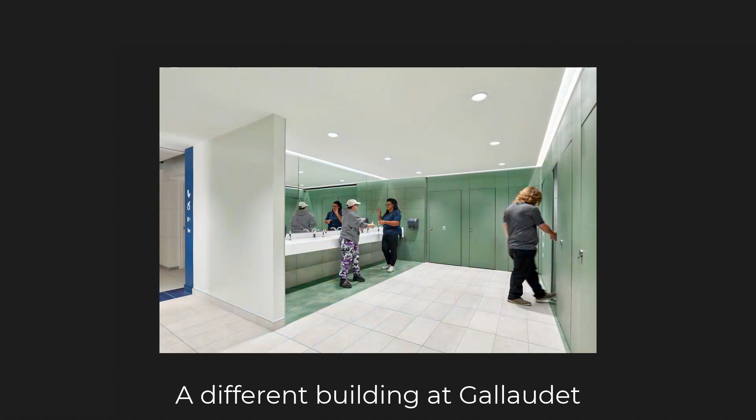So what they did is where the restrooms used to be, there's this lovely lounge, Wi-Fi and everything, and just a series of restrooms, each of which has a sink, a toilet, a urinal, and a changing station. You just wait till one says available and you go in and use it. It's not space efficient, but it's certainly welcoming. And to me, that's sort of the most clear example of universal design that I've seen.

Okay, so I think in this course, where the mouse meets the screen, we're actually going to be drawing stuff. Mostly we'll be dealing with all the issues of accessible routes and of plumbing elements and facilities. Those are sort of the names of those in the ADA book.

An accessible route is everything from the bus stop to the bathroom and the dean's office. It's talking about curb cuts, the angles of a curb cut, so you can get a wheelchair up it, or on your crutches when you break your leg or something or other. Which brings up something else: wheelchairs represent sort of the most extreme case of what we need to accommodate.

But imagine a supervisor in an auto parts plant where you wouldn't be thinking about handicapped access. And he broke his leg skiing, but he's going to be on crutches for a month, and he needs to get everywhere to see what people are working on. He needs to be able to use the bathroom. So it's not like this is just for customers or students. This is for everybody employed and going everywhere, using anything that they need for their job.

So it really is beyond getting wheelchair people into the building. It's the whole thing from the curb to the restroom and everywhere in between, up and down, anywhere that people have a need to get to. Not mechanical rooms, not up ship's ladders into the attic, but the rest of it.

General background, I just want to throw this in because it'll keep coming up as we're going through the different codes. There are a lot of ways to describe a building. One is, how is it built? What is it made out of? From a fire safety standpoint, how combustible is it?

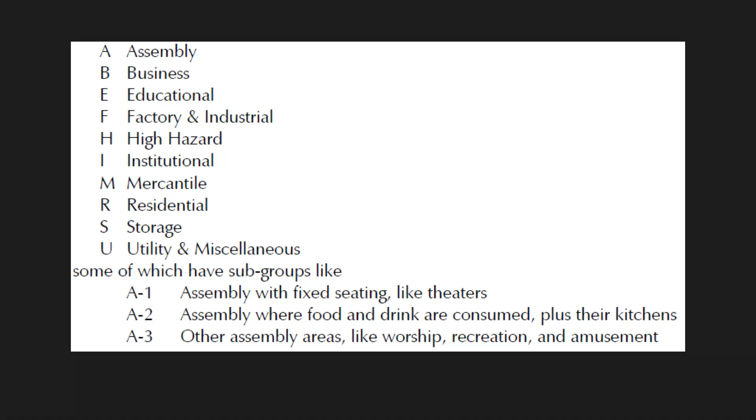And some of those occupancy groups need different kinds of routes to get into them and to get out of them. For now, I'll be mostly addressing accessibility, just being able to get to stuff. But this whole time, a lot of these routes will also be used for emergency egress. And that's where the egress calculations come in, which is how wide do the doors have to be?

How wide do the hallways have to be? How many doors? How many halls? How far apart? What direction do they go? That kind of stuff. And I want to address that theoretically in about 2 weeks. I'll have to study up on it because I haven't been responsible for planning it for a while.

So we're starting with ramps, what's involved with them, and then moving on to stairs. I'm going to skip handrails and guardrails - there's a lot there that I want to cover as part of the talk where I address complex assemblies, like storefronts and other things.

A big part of all this is clearances at doors. Depending on which direction you're coming at a door, especially in a wheelchair, which is worst case, you need to either get next to it and be able to reach it and pull it open, or can you just push it and go in, or does it have a closer? So on page 3, I've combined the 6 most common ways to approach a door and shown graphically the clearance you need, which can't have sinks, walls, or columns in it.

Elevators are pretty easy - basically we're just given a rectangle we need to accommodate, and the ones that come with Revit we can adjust the width and depth to fit the space we have.

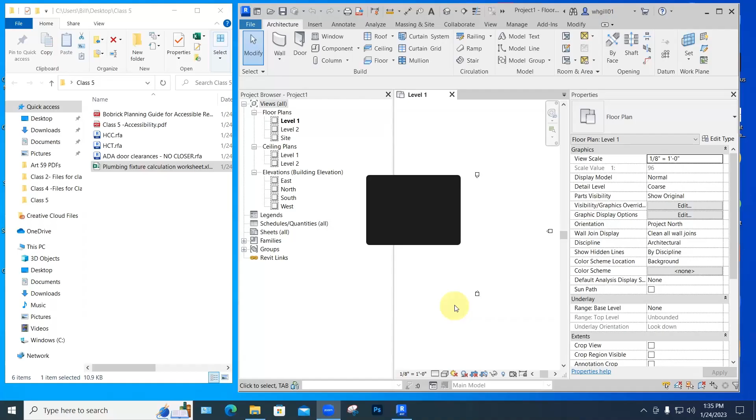First of all, what is a ramp? A ramp is a ramp - if the slope is less than 1 unit up for every 20 this way, it doesn't count as a ramp. An ADA compliant ramp is one whose slope is from 1 to 20 up to 1 to 12. These are horizontal and vertical dimensions, not along the slope. So anything in that range is what we're dealing with, and anything over 1 to 12 is verboten - can't do it in accessible design.

At a loading dock somewhere, they need to put in a ramp to get hand trucks up, and all they have room for is something steeper than that. Fine, do it - it won't be used by people in wheelchairs, so it's not part of the required accessible route into and out of the building. Similarly, you can have as much slope as you want on a site, and put handrails on it if you want.

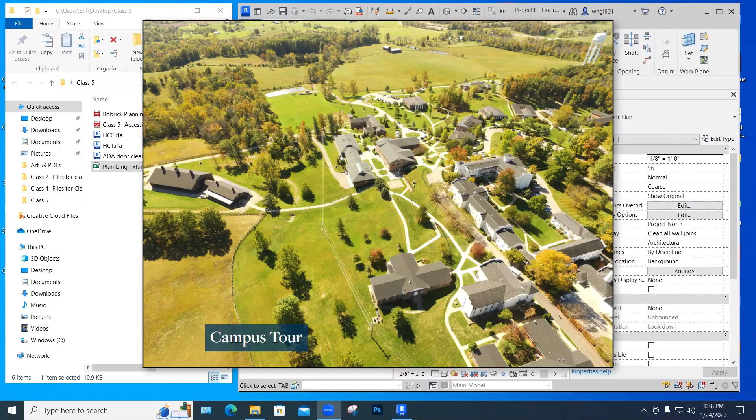For the past 20 or 30 years, I've worked on various projects at a residential school for mentally handicapped adults, some of whom have other mobility and balance issues. Lately, we've been adding handrails to walkways considerably less steep than 1 to 12, usually on both sides even if it's about 8 feet wide. That seemed like extra money, but I asked about it and was told: we don't know which hand works. If you're going up the hill and this is the hand that works, but there's no handrail there because it's on the other side, that's not going to work - you can't back up.

So that was instructive to me to start thinking about, oh yeah, this is more multidimensional than I'd thought about. Ramps got to have handrails, and usually those are 2 parts where the guardrail is what actually keeps you from falling off, and that's usually 42 inches high. Then the handrail is what you grip down below that, so you can pull yourself up the hill.

Ramps need to have a level landing at least every 30 inches of vertical rise. And if we're assuming we're working at 1 and 12, that 30 inches here, we're doing 30 feet here. And then we need at least a 5-foot landing and then another ramp, and then whatever happens at the top and the bottom.

At the top and the bottom, we also need 5 feet just to come off level and get situated and turn around. You can't just come off it and then hit something. You've got to have a place that doesn't have doors swinging into it or columns or anything like that. So that's also 5 feet over here at the top. And that might be part of the floor, or it might be structurally part of the landing. It just depends on what that particular configuration is.

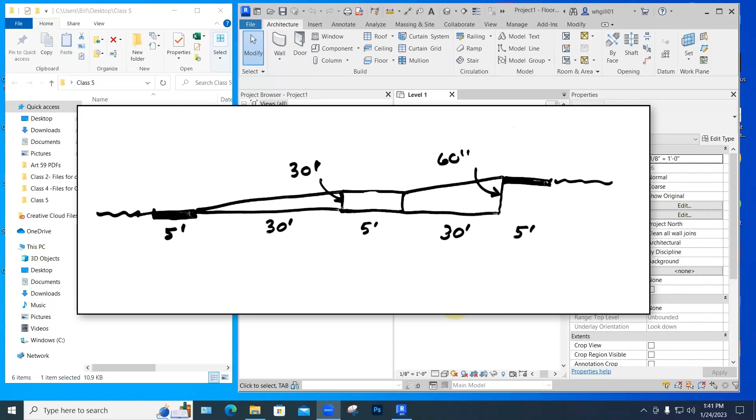But these get really pretty long. If we want to go up, let's say 5 feet, 30 feet there, 30 feet there - the whole thing is 65, 70, 75 feet long to get up just 5 feet. So it's a chunk of space. Easy to do outside, hard to do inside in an existing building, interesting to do in new construction. We're starting to really think about it.

Let's just look at those. The tool here is ramp, architecture ramp. And as we're building that, as we're creating this, property starts determining what kind of ramp this is going to be like. The first thing we do is figure out how high it needs to go from landing to landing. It always defaults back to level 1 and level 2.

So if you just want to go from level 1 up a little bit from there every darn time, you need to come back and change it to level 1. Let's say we're going up 6 feet - so 6 feet is 72 inches. We know we can do 30 inches per run, so we know we're going to have to have at least 3 different runs, 30 maximum, and 12 off at the end. Or we could do 3 24s, or we could do 4 18s.

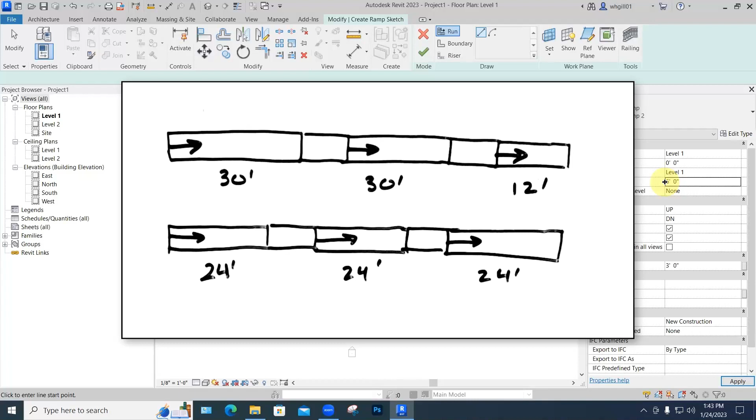You can just do that, whatever your geometry, and if you want to go around a space, like with a tree in the middle, that could be 3 runs. If you want it to zigzag, that could be 4 or 8, any number like that. At some point, the landings just financially start becoming this big amount of it, and I think generally we want to sort of play them back down.

But let's say we're going to do the 30-inch one, 30 and 12 first, because Revit does that all by itself. In edit type, it says, what's the maximum length of incline? And it's just going to stop there at 30, and then we are prompted to start a new run. So this ramp 2 type, I'm going to rename it to be 30-inch rise, just to remember how this is working.

Since we made that change, ramp 30-inch rise, going 6 feet, I'm just going to start here and start drawing. As we zoom in, I have to click to say where I want that to stop - it'll stop at 30 feet. And then the next click will be the end of the landing and the start of the new run. So we're just doing point, point, point, point, point, point - 1, 2, 3, 4, 5, and 6. And for right now, I'm just going to eyeball 5 feet.

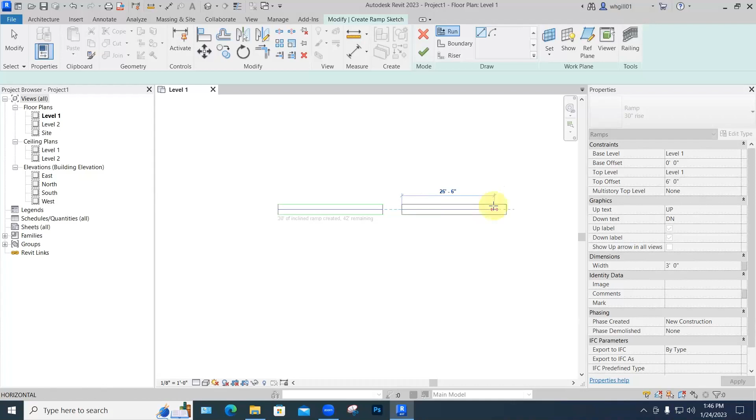I think right now it's 3 feet wide, as we can see here. I'm just going to go over here somewhere, and then here comes my next run, which I can aim in any direction I want, but I'm just going to keep it going straight for now. Click, start my next one, and it'll put in the 12-foot one. I'm just going to say, okay, close enough, good enough for government work.

So it'll turn that sketch into a 3D ramp with a railing on it.

And for right now, I'm going to erase the railings because they are just in the way and I don't want to deal with them yet. So I can just pick the railing, hit delete. It's easy to put them back on. So there's that.

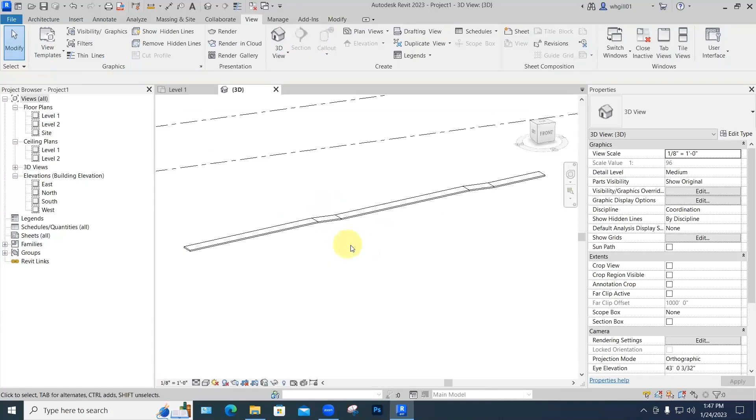Right now, it's hard to tell that that's any different from essentially level. We're just sort of crooked. But if we select it and go to edit type, we can change its shape from thick, which means like a thick slab, to a solid that goes all the way down to the ground like a big exterior concrete ramp. So now you get to start to understand what that's all going.

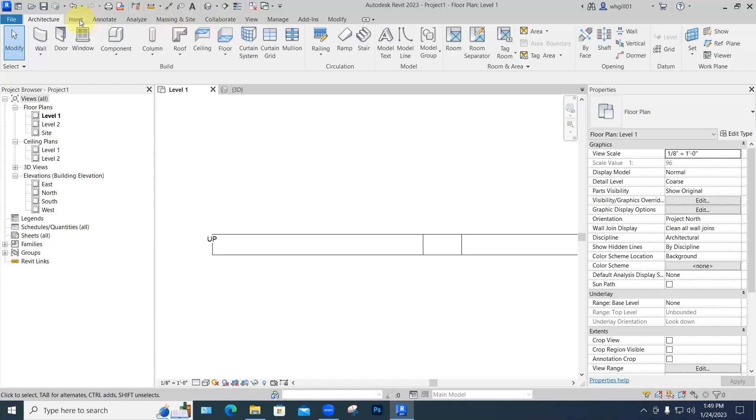Okay, so my boss says, Bill, I want to spend as little money on this as possible. Are you sure those landings are only 5 feet long? Make sure they're 5, but don't go over 5. So I'm going to just put dimensions on here. Annotate, dimensions. And there's our 30. Oh, I spent 5 inches too much.

So fortunately, because all 3-dimensional objects in Revit are created from 2-dimensional ones, all we have to do to change the 3-dimensional one is to modify the 2-dimensional one to be what we want. So if we select the ramp and go to edit sketch, now we're just dealing with lines. And we'll start dealing with stairs the same way, where they have a green boundary that runs down the edge, and then the black risers where either the step happens or the landing starts.

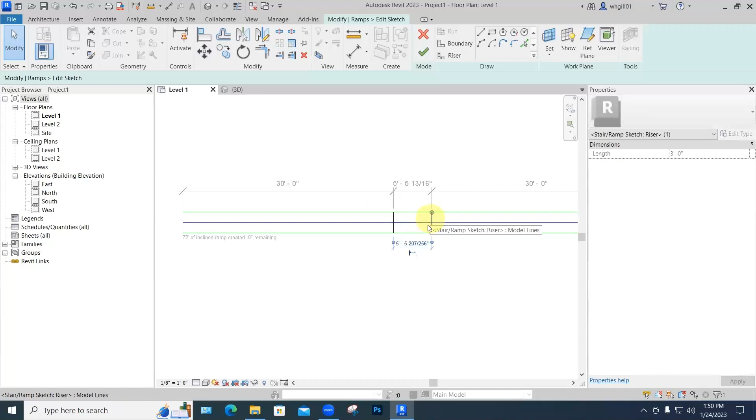So this is fine. If I want to move this guy in to where that's 5 feet, I can select it. And then down here, instead of 5.5, I just say 5 feet. And then that moves down to be 5 feet. In all of these, to change the location or the size of something by using its dimension, which is a wonderful tool, you don't pick the dimension, you pick the thing, because that's what you're modifying. And then the temporary dimension shows up and you change the dimension there.

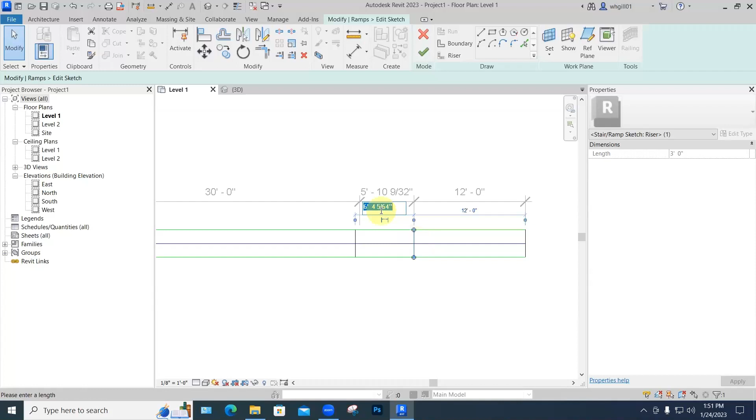So since that moved down some amount, I want to move this down some amount. So I pick that line and it says 30 feet. I'm just going to make it 30. We're still good. And then to move this guy, I make him be 5 feet. And then move this guy, so he's 12 feet. Let's hit OK and see if it works. Et voila! These all take some practice. So there's a straight ramp that goes up 6 feet.

If we wanted one that had even 24-foot sections, we could create it from scratch, or we could just take this one and move the landings, just as I moved them before, so I have 3 equal 24-foot runs. And sometimes it helps me in a plan view to sketch with detail lines what I want to have happen, and play with it on the level of lines and spaces, offsetting 5 feet for the landings, rather than dealing with the whole 3-dimensionality of it all the time. And frankly, I often build my stairs and ramps outside the building shell just so I can see it and make sure it's right, and then I just move it into place with a corner or something.

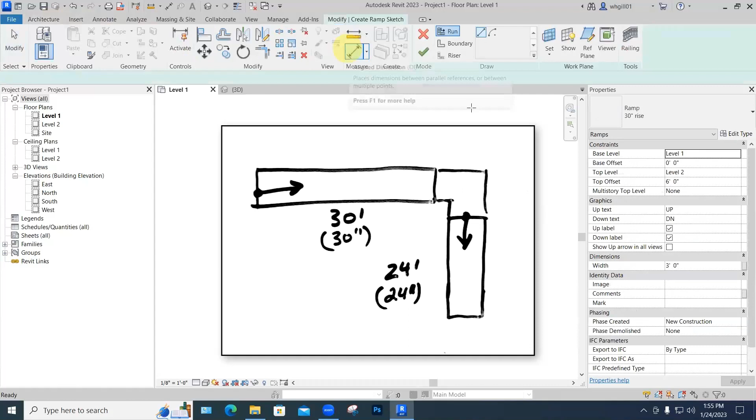So how about an L-shaped ramp? Let's make it 4'6". So we'll do a 30-foot one here for 30 inches and a 24-foot one for 24 inches. And this will be the landing. Here's how you do that. Architecture, ramp. I got to go back and change these. I don't want it going 6 feet above level 2, so it changes back to level 1. Make this 4'6" so I don't have to do too many landings. L-shaped one, 30.

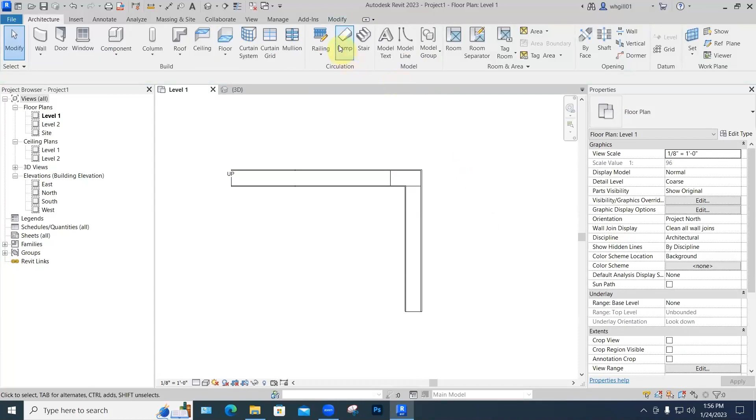And then remember, the next point I pick is the beginning of the next run of the ramp, and Revit will create the landing. If I want the next run to start right there, I'll do that. Or if I want to make the landing be longer this way, I'll go like this and then start it down here, let's say. And Revit will put in the L-shaped landing. Once you absorb how it works, it's a pretty clean process.

Stairs, if you're working inside a room, do you want the points that we pick to be down the middle of the staircase or over against the wall and into the corner? Ramps don't have that. It's just always right up the middle. And we can always adjust it to suit. And when I say adjust to suit, we can now edit this, if it should have been 48 inches wide, or I don't have that much room for a landing.

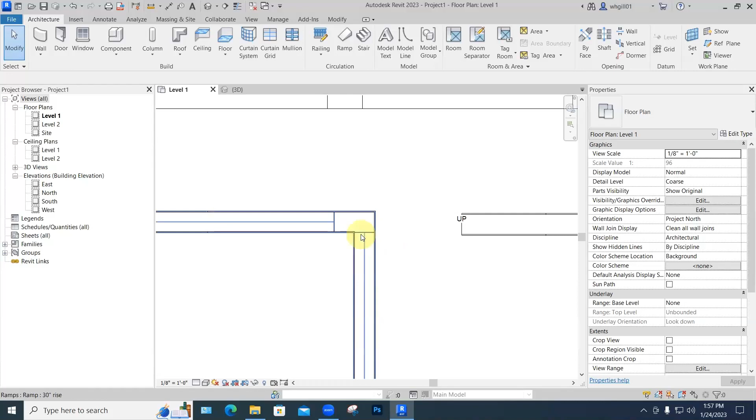You can always come back to a ramp, and let me get rid of these railings just so we see the thing itself. We can select the ramp and go to Edit Sketch, and now we're back just dealing with the lines again. So if I want a smaller L-shaped landing, I can move this down, move this back.

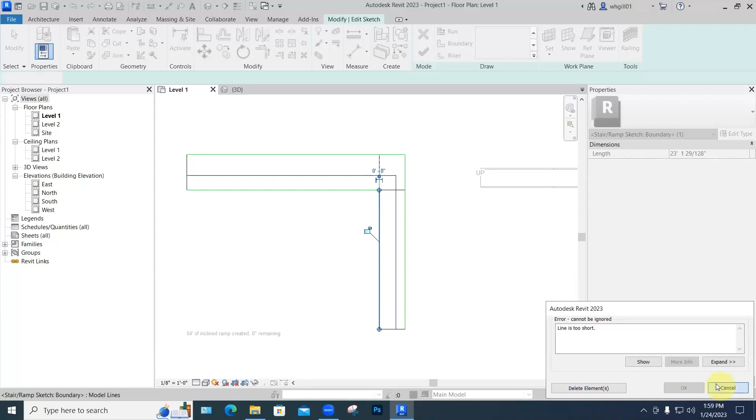L-shaped landing. Well, Control Z. I'd have to think about that. We can stretch these out to make them wider. Line is too short. Cancel. Line is too short. Cancel. That was some little line. Oh, I'd shortened that line up too small.

In which case I can get rid of it and drag this one over to here, and then slide this to be to there. Revit won't check to see if this is a valid ramp until you finish editing, so you can play with the lines themselves to your heart's content. So we can play with these once they're approximately in place. We can tweak them to fit the space available.

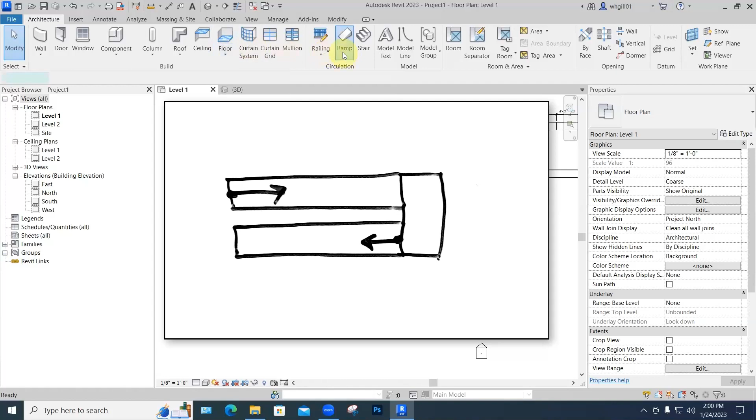What else do we have? Well, I'll try to do one that's just like this, where this one ends, this one starts with a gap in between ramps. Back to level 1. Go there. And then to start in line to go up this way, I'll wait till I get that blue alignment arrow going. Click and click.

And if I wanted them to be equal... Yeah, shortened it too much, but you can play with them that way to make them work. The architectural project template comes with two ramps, ramp 1 and ramp 2. They're identical to start with. And for some reason, ramp 2 is the one I picked, and I renamed it.

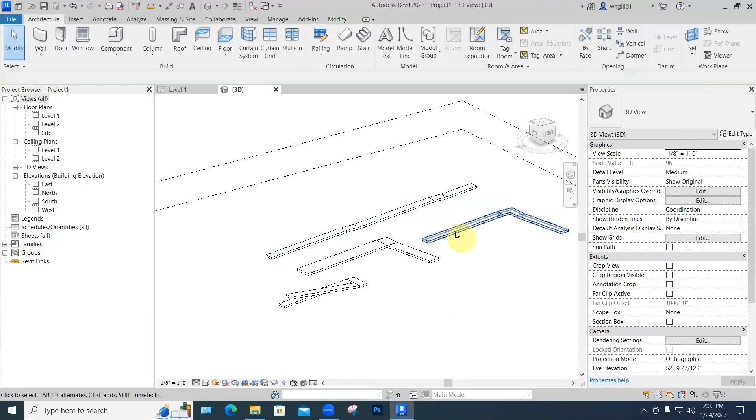If I go into edit type, we have the choice between solid and thick. And thick is just a slab. So if I change that ramp type to thick instead of solid, we can also set how thick it is. Let's say 8 inches. Apply. Okay. So those all become 8-inch slabs, which I'm not going to keep because I want to see the thickness of them. You'll be glad to know that stairs work much the same way.

We define runs of stairs and landings and another run. A couple of things to bear in mind as we're dealing with accessible design: the minimum riser height tread to tread is 4 inches. And the circular one out here is pretty shallow, it seems to me. It might just be like 6 inches or something. 7 is more standard. That's also the maximum. And you can't have open risers. It's got to be something solid that people's toe would meet.

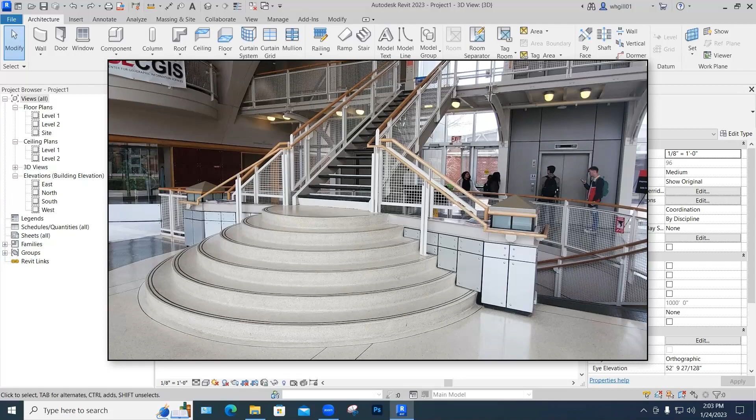It looks awfully nice, that staircase, but imagine somebody on crutches going up there with a cast, and their foot goes past the riser and they fall backwards. That's why risers are closed. Your toes hit something before they go through and imperil you.

Just so you know. Also, the ADA standards come from the Justice Department. It's not like transportation. It's not like health, education, and welfare. It's the Justice Department. And this is the Attorney General of the United States and his minions on down the line who are charged with enforcing this stuff. Even presidents and ex-presidents get in trouble with the Justice Department. So be good, children.

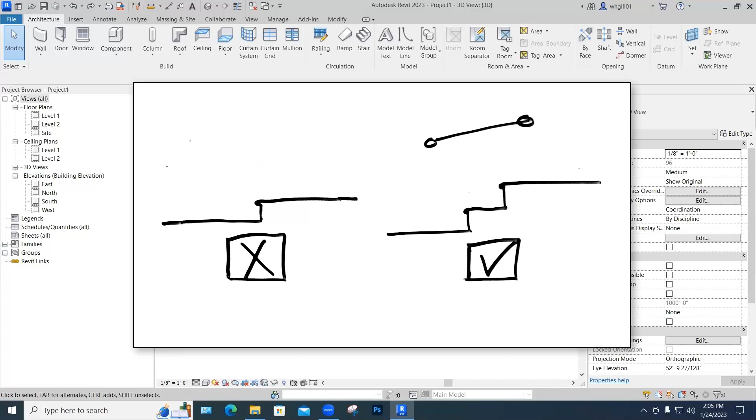Okay, enough of that. Stairs. Minimum tread depth is 11 inches for accessible. And the minimum number of risers in the run is 2. It's really disconcerting, this is a section view, just to have that happen. Even if there's a handrail on the wall, nobody sees it, nobody pays attention. Got to have at least 2 and an appropriate handrail for that whole thing. And the handrail is as much to call attention to it as to actually support people who need it.

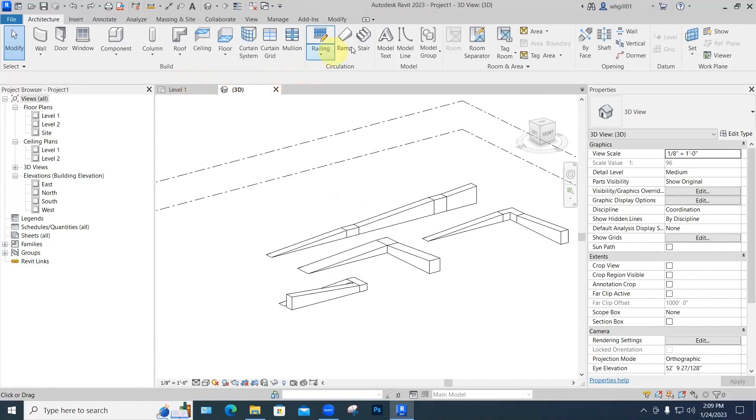And we have 2 types that come with the program. This assembled stair, which is treads and risers and stringers and stuff, or monolithic, which is like cast-in-place concrete, one big solid lump. Let's look at that one first, because it's clear what's going on without dealing with all the parts yet. So let's say a monolithic stair going from level 1 to level 2. Fine. We can draw it in 3D just as well as we can draw it in plan.

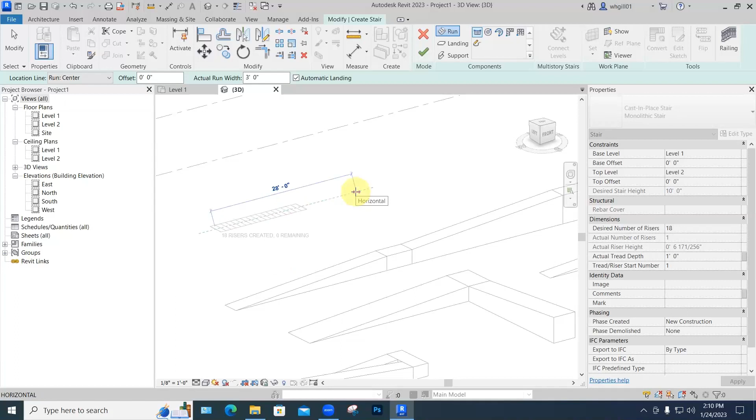The blue line will snap in when we're at 90 degrees. Well, let's see, we'll do it down there. Yeah, when you're at 90 degrees, so you don't have to fake it here. So we're seeing 18 risers created, 0 remaining. Looks good to me. Okay. And again, I'll get rid of these. So if we look at this in a front view, can I do that? Let's move that over there.

Let's put a couple of dimensions on that just to see what we're dealing with. Make sure Revit did what it was told. You can't dimension. This is really a 3D view that happens to be looking at the staircase from the front. It's different from a true elevation view.

This one I can just, if I want, start doing that too, which you can imagine would make dimensions just go nuts. So let's just come into the south elevation view. This is a true view where we can do what we need. Why isn't that working? In the middle of the command.

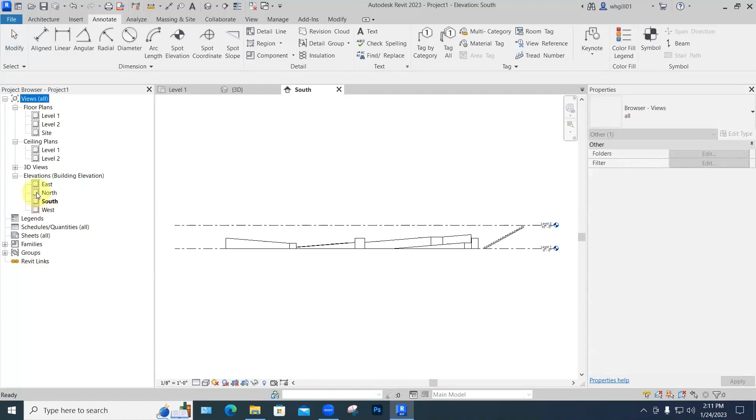What? Huh. Why did that do it? Oh, it didn't do it because I clicked on the little button, not on the word. Let's go back to south. That's where I know what I'm doing.

Okay, now in an elevation view, I can dimension this. Aligned might pick up like the angle here because that's an aligned edge. So I'm going to use the linear tool, which will only give me horizontal and vertical ones. For reasons unknown, it's just not picking these up. I'll try something else.

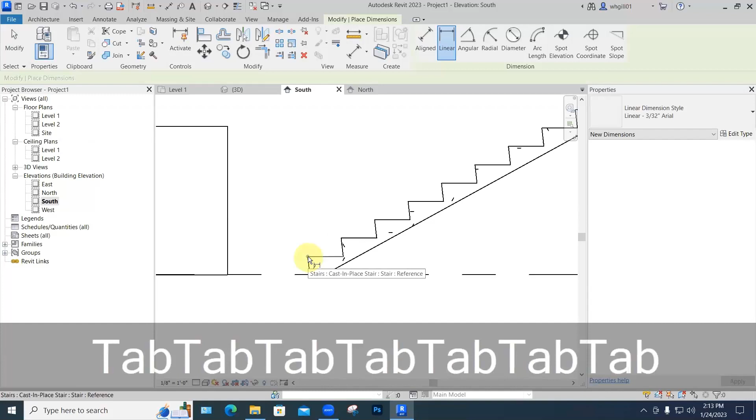I'm not sure why it's not picking up the edges right now, but as with many things in Revit, when you are hovering over a point, you can hit Tab a couple of times until the different things that it could select there are actually selected. Oh, there we go. Well, let me go from endpoint to endpoint.

And then again, with this linear dimension tool, if you drag it up, it gives you the horizontal dimension. And if you drag it sideways, it gives the vertical dimension. I'm going to change my scale from 1/8 to, let's say, a half inch equals a foot, just so my text will be smaller. So that's the riser height.

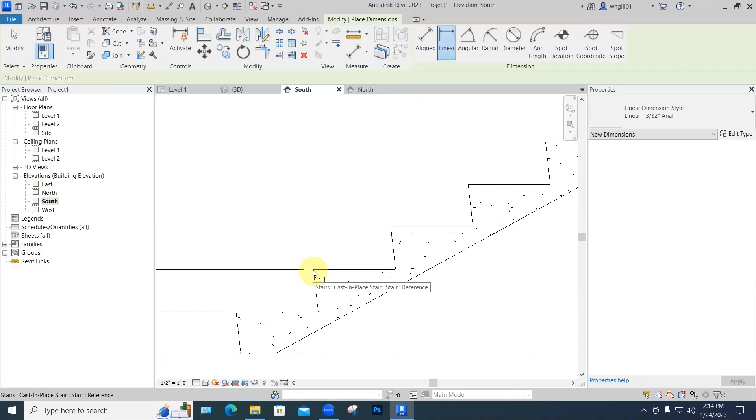And then the tread depth is from one nosing to the next nosing horizontally, and every one of the codes will say the exact same thing. So we'll go to linear. You have to tab till you get a point, tab till you get a point, and then drag it up.

A 1 foot tread depth is greater than I need. I only need 11 inches. Generally, we're trying to keep these as small as possible within the code so we don't have to pay the extra money or take up the extra space. So let's see why that did that.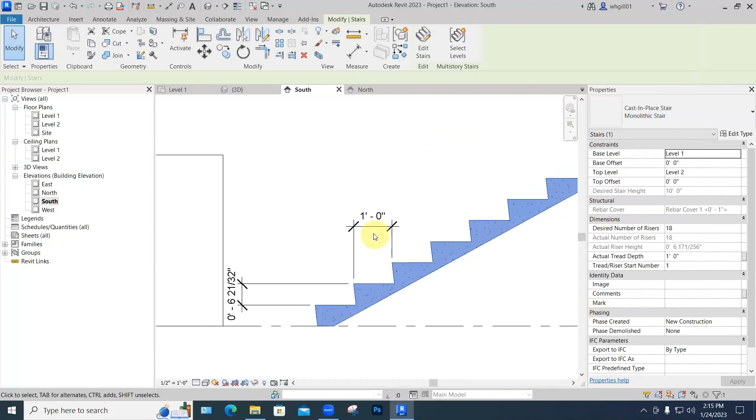If I select the staircase, go to edit type, I can see, oh, that's because that type wants to be a foot. So I make that 11 inches. Apply. Okay. We changed the minimum tread depth to 11 inches, and this is 12 inches, so it's still okay.

Let's go back to do another stair right next to this one to see: architecture, stair, cast-in-place monolithic stair. And we can see that now it's set for an 11-inch tread. Minimum tread depth, okay. Now I'm just going to start right here, and we'll get that far.

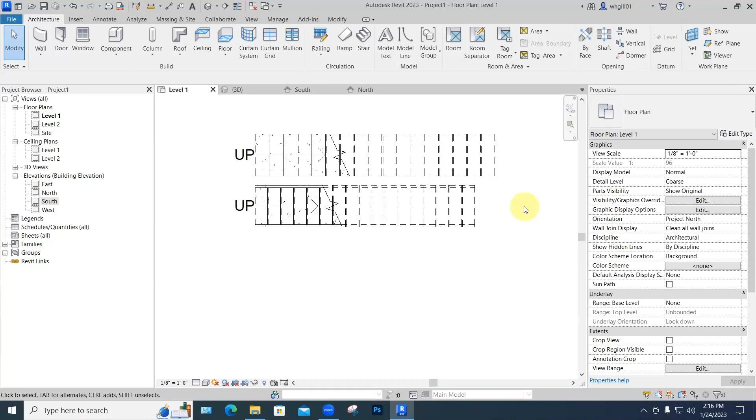And okay. So we picked up 1.5 feet because we got rid of 1 inch times 18. So we're that much shorter. So the riser height will be the same. And the ending height will be the same, but the tread length will have changed from 12 to 11.

So let's say that for some reason we would like to add a landing. What's the procedure? So we'll go with this same stair type, and we go to architecture, stair. It will remember our previous settings. But actually, it would always default back to level 2, but in that case, this is what we want to use.

So knowing that I have 18 treads, I can click here and go to where 9 are created. 9 risers created, 9 remaining. Click there. Come over here a ways, whatever I like, to start the next run.

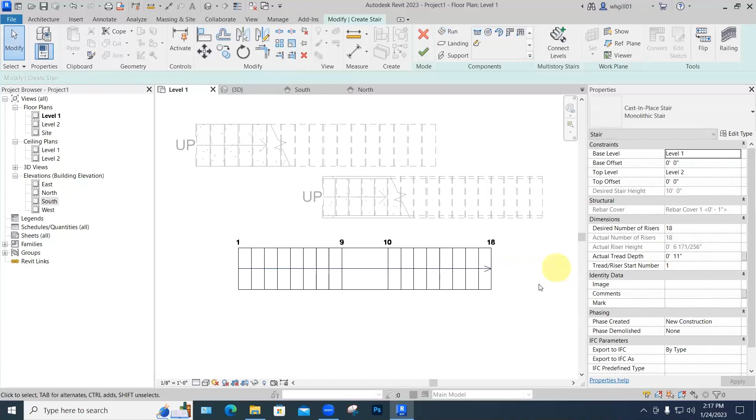And take the rest of them. And I can drag this out past if I want to, it doesn't matter. And we see that Revit has put in the landing from where those 2 points, point 1 and 2, point 3 and 4. Run and run. So there's that guy. And you can figure out how to do the other stair and landing combinations.

Let's look at some of the options that we have with stairs. One would be to change this guy back to the built stair, basically wood treads with risers underneath. We'll change it from being a monolithic stair to being the assembled stair made out of parts. And at this point, these could be anything. We haven't yet determined a material for that. In an office building, that would be a steel channel running up there and holding steel treads. In a house, that might be a 2x12 with the wood treads in between it.

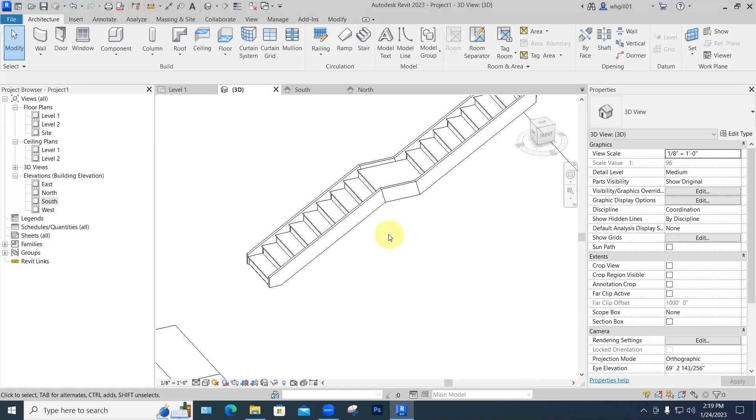But we have a couple of choices of placement for this. Let me put a wall here. Where are we? This guy, I guess. Just to show you some of our options. So if that's against a wall, in a residence typically, and this is freestanding, so you can see we're going up. These are called a closed carriage, where the ends of the steps are blocked off by the stringer.

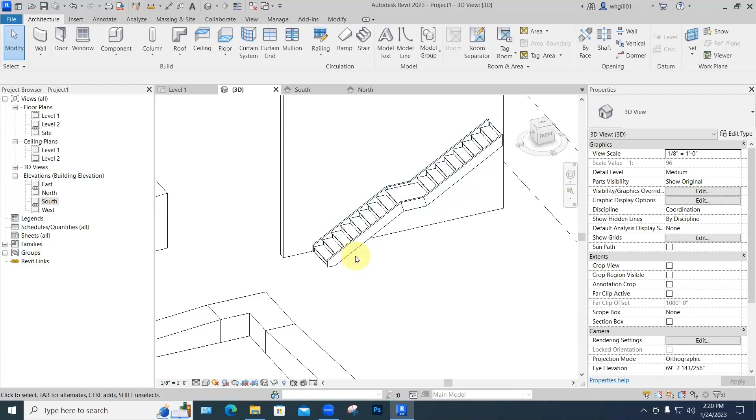If we decide we want, let's say, this side to be tucked in underneath it, we're going to edit the type. So this will apply to all the stairs that we put together like this. So we might really want to duplicate it, rename it to be assembled stair, right stringer underneath or something. But let's just look at what's possible with it. I'm going to edit type. I want to say that the right support, which is the one out here towards the room, I want that to be open. So that tucks in underneath.

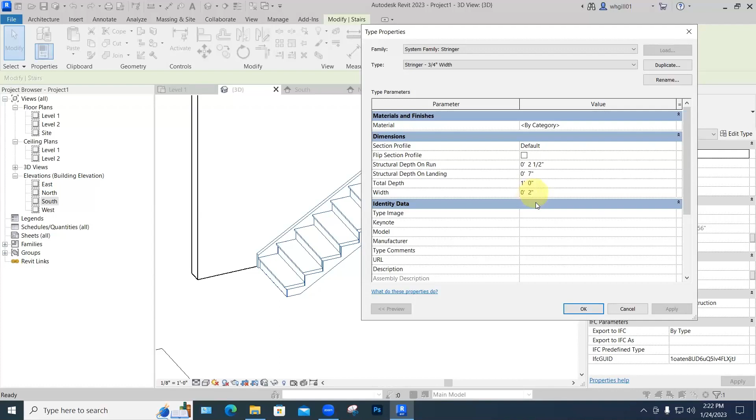And the other one, I want to be not 2 inches thick, but just a 3/4 inch piece of 1x12 that slides in there and receives those. So again, we can go to here, edit type, and say that the left support, this is always as you're going up, the left support is going to be closed, but we're going to have to duplicate this and make a 3/4 inch stringer, just with edit type duplicate. Okay. And then we actually change the width of that stringer to 3/4.

See if I'm doing this right. Okay. Good. And then that shrank down to be 3/4 inch standard trim material instead of a big fat construction 2x12. At that point, I'll need to move this whole thing back against the wall, but you can see what the effect of that is.

And lastly, with this run type, you can see we've got not only a tread, and the treads are rectangles, but a nosing has been applied to this, and we can choose the shape of the nosing. There's just a couple built in, this one and like a half round. And we can choose which edges those go on. So this is like before they put the trim on. I want to basically add that nosing around to the right side of the tread to hide the end grain. So it'll be a miracle if I get through this whole thing doing it right. So run, and there's a 1 inch nosing. Okay, that's good. So we can say apply the nosing profile, not just to the front, but to the front and the right. That should wrap around just on this exposed side.

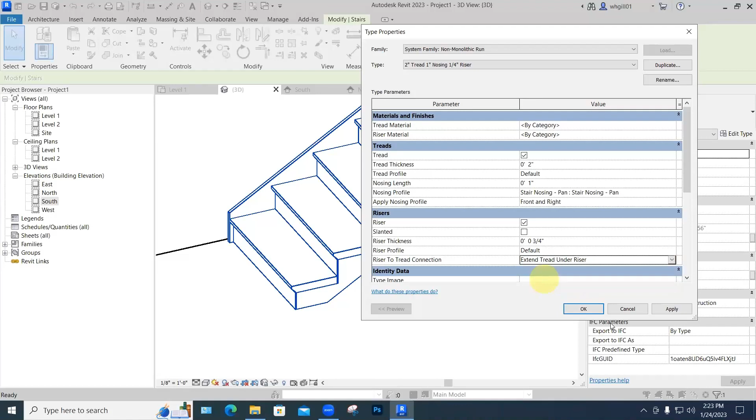And I'm going to make the riser thickness 3/4 inch, because that's what it would be with wood. 1/4 inch is like for metal. And instead of extending the riser coming down behind the tread, I'm going to have the tread go underneath the riser. Extend a tread under a riser. Okay, apply. Okay.

So just with the blink of an eye, potentially a whole building's worth of staircases that are all of this type had our carriage inset, our nosing extends around this exposed side, and this has changed from being a 1/4 inch piece of metal to a 3/4 inch piece of wood.

I would suggest when you are just laying out your stairs, not even to think about this level of detail, but get them in so the big geometry fits your space, and then come in and tweak and tweak as appropriate. Even though it's easy to revise stuff in Revit, to have to come back and fix little things when you've just been making some big changes doesn't make sense. If your whole project works at the same level of detail and gets more detailed as you go along, as opposed to one part getting highly detailed when other things haven't even been thought out yet, it seems to be a useful way to work.

Let's take a 5-minute break and come back at 2:30. We'll start dealing with whatever is next. I wanted to start dealing with door clearances.

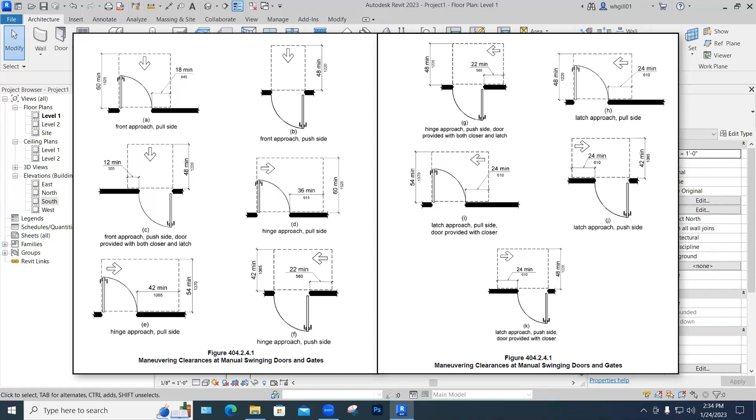Maneuvering clearances at doors. And although the ADA standards has all those little diagrams of what direction you're coming at, depending on whether the door is swinging in or out, it's hard to keep track of all those. For one thing, the doors aren't all drawn in the same orientation, and you're not always coming in the same orientation. Some are left swinging, right swinging, in swinging, out swinging. It's hard to put together.

So last night, I put together something I've been meaning to do for 10 years, I guess, which is a little graphic to overlay on top of a door that you have in place to see if you've met all the required clearances. So let's just go to component, place component, load family. And for me, it's here on my desktop, class 5. It's the ADA door clearances, no closer family.

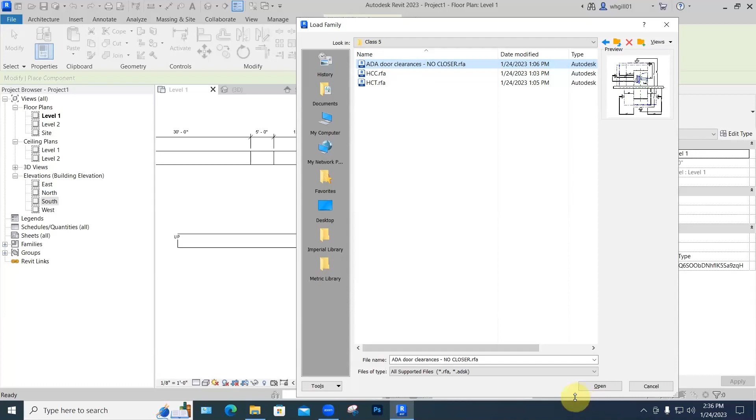And it actually behaves like a door in a wall. You just put it right on top of your existing door to see how it works. So I'm going to pick it and say, okay, let's open that. Oh, okay, my mistake. This is a door. It's made like a door, and it was made that way so that it will adjust with the thickness of the wall when it's being placed. So you don't actually load a component, you actually load a door to bring it into the drawing.

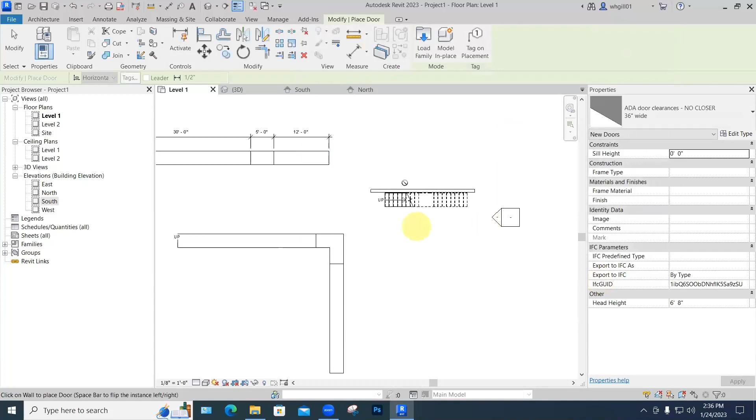So cancel this. So actually I go to architecture, door, load family, and that will import a door into the model, that same one. And we'll do the same thing. Well, these guys are just regular components. So I won't place it right now. I'll hit escape, but it's loaded into this file now, and it'll be here unless we purge it or something. So let's go create a wall. Do a nice one.

I'm going to put a regular door in this wall. A regular door, let's say a 36 by 80 standard door. I'll flip it around that way just to see what's going on here. So that little sketch is a door that we will also insert into this wall. It doesn't actually penetrate the wall, it just sits there.

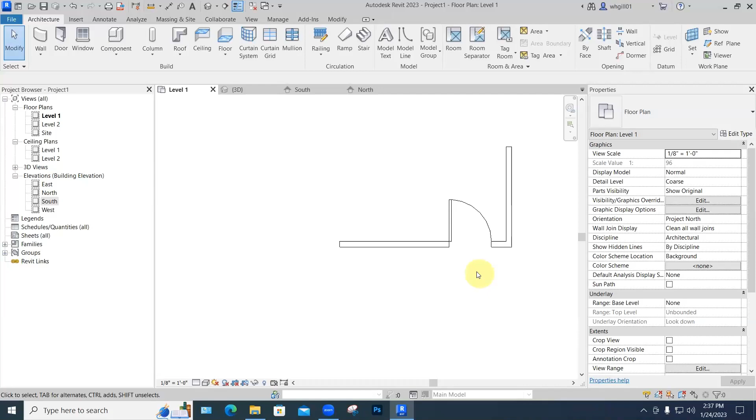The door, use this, and it's only 36 inches wide. I didn't make it so it would accommodate bigger doors because this is what we're all using. And now basically that's inserted into the wall just like a regular door. And it has the same controls, so I can flip it to make it match the door that's there. And then I can just drag it in place so that it overlays the actual door showing the clearances required.

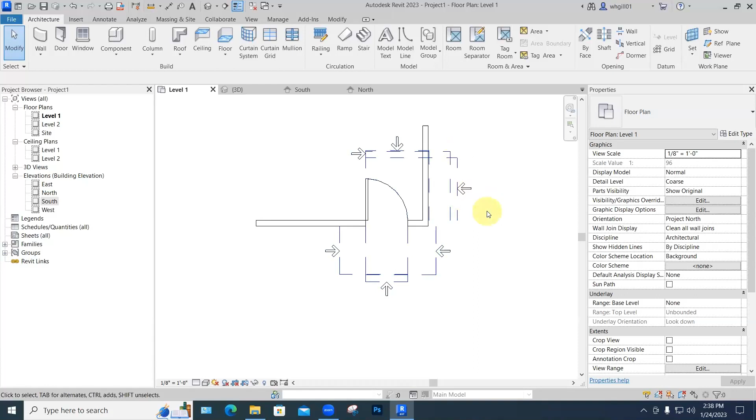So a couple things. A couple are sticking out into the walls, so we sort of want to understand what's going on there. But since we're never going to be approaching this door from this direction, we can ignore this rectangle, which is the space we need around the door when we are approaching it from that direction, which would be pull side, latch side. So it's the pull side of the door of the wall and the latch side of the door.

If we're coming this way, you can zoom and see this arrow indicates this rectangle, which is a 48 by 60. And we can see that one does not work. If we're coming straight at this door here, I need to move this in, click, click, click, until we're at least like there. And then move this door, the real door, until it lines up or is better. It's a nice tool. It's a nice damn tool.

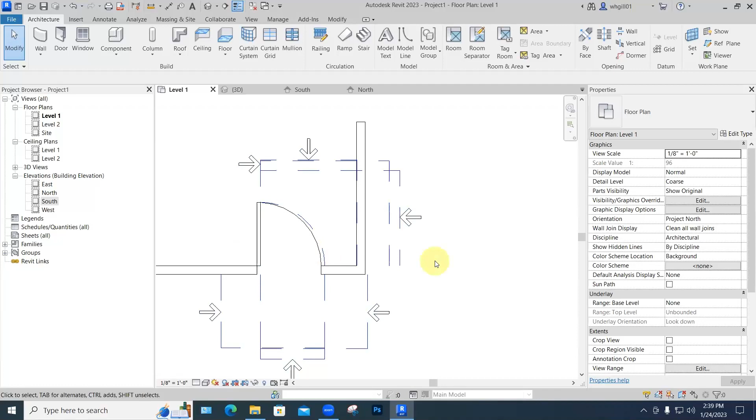And actually this goes over here because we're going to the door opening. Okay, so we got a little bit extra clearance there. And we're never approaching the door from this side, so we should be good. I think in the real world, you would probably flip this door that way, flip this that way, and then move it over so you just optimize your space inside the room. These guys can move together.

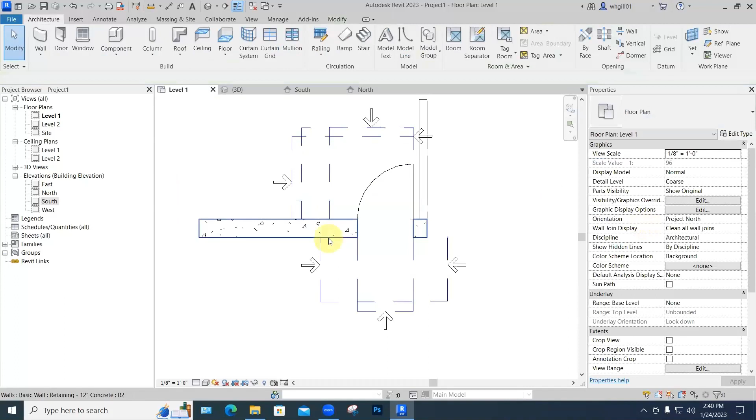Anyway, I'm very proud of this. And let's make sure of something. If I change that wall to something fatter, it does. It works. So it adjusts on the other side. You never know about this stuff. Okay. As we can see from outside or whatever, we're in the clear.

And because it's not part of that door, once you get this one set, you can just erase it or move it over to another one where you happen to need it to be. Yeah, that was really fun to see happen. Let me show you what that family looks like, just as long as we're at it. Edit family.

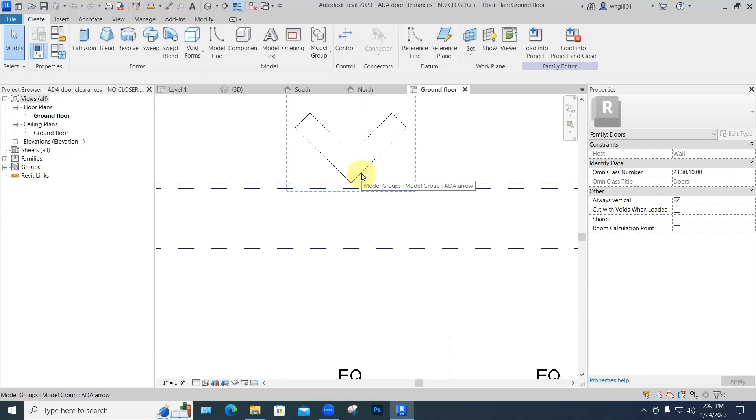There's the plan view of it. What I found was that the arrows, I couldn't just put them right to touch the line they wanted to be on. They jiggled around some, so I made these a foot and had the line locked in at 5 feet, the door locked in, and the arrow locked in at 6 feet. But it worked out. I'm tickled.

With the line types available in this door family, I couldn't create different colored ones, like a red rectangle, a green rectangle, and a blue rectangle. But it's clear what's going on. Anyways, so that's that, we can get out of there. We'll get there, you will get there.

And I should say this guy is just for the regular door with a latch on it, like ones in bathrooms that have closers on them, which swing themselves shut. Does this one do that as well? Yeah, there's a little extra 6 inches here and there to deal with, and you can find those back in the ADA standards to know just which one it is.

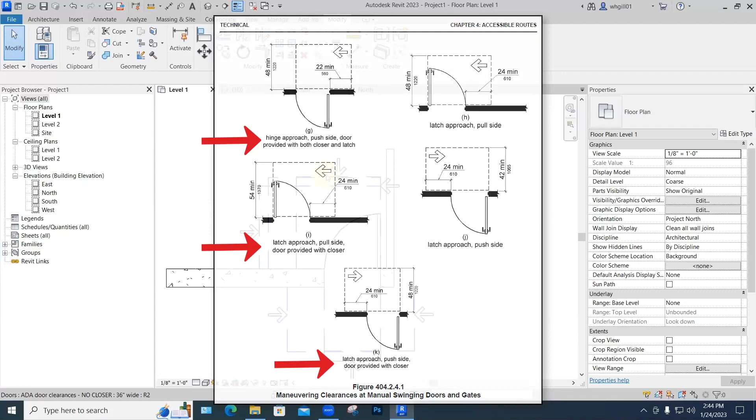I could do another one, door with closer, but there's a couple of permutations on that. So, I find this takes care of a lot, 90 or 95% of the doors that I put in. And I only did it with 36-inch doors.

Standard wheelchairs are 28 inches wide, and the ADA requires a 32-inch clear opening from the open leaf of the door to the opposite stop. So a 34-inch door will usually be just adequate, but except in extremely tight circumstances, a full 36-inch door is almost always used.

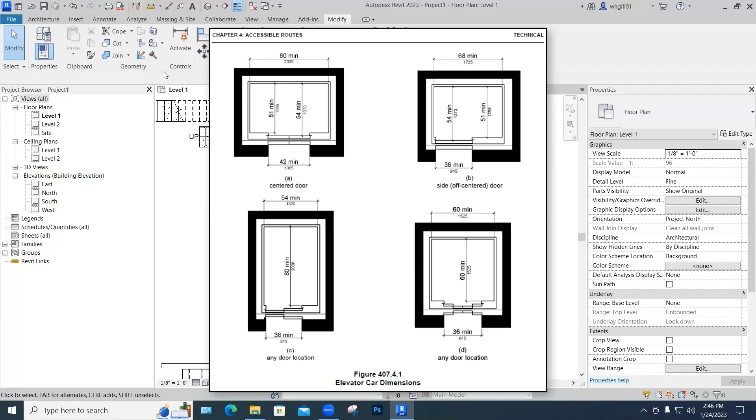Okay, so that's that. Elevators are going to be easy. Interior designers are rarely responsible for specifying the size of an elevator, but generally the process would be to select one of the basic orientations from the ADA standards based upon the size of the hoistway and the location of the door. Select a manufacturer like Otis to get actual cab sizes, and then use Revit to place one and adjust its dimensions accordingly. We just go to architecture, component.

Finding them is the tricky part. Place a component, load family, go over to Revit Imperial Library. And this, I think, is in specialty equipment. Specialty equipment, and we got 2 elevators, hydraulic and electric. And as far as I can tell, the dimensions of these behave identically.

Hydraulic basically has a piston set into the floor of the elevator shaft, drives the elevator up and down, and electric ones are pulled up by a winch up top somewhere, but it's not our business. We don't care. Let's use electric.

Let's see what our options are. Edit type. Well, I think the width and the depth are the size of the shaft, inside sides of the shaft. Cab width and cab depth are the interior measurements of it. That's the only ones really even working with in architectural work. I don't think I've done more than about 10 elevators in 30 or 40 years. It's like I work on little cheap projects.

I don't know, maybe that's it, or they've been there already and we're coming in and doing rehab. But anyway, so you can change all those. And let's say if I change the cab depth, a freight elevator or something we wanted to put in there and make that be 10 feet. Apply. Okay. So it gets deeper.

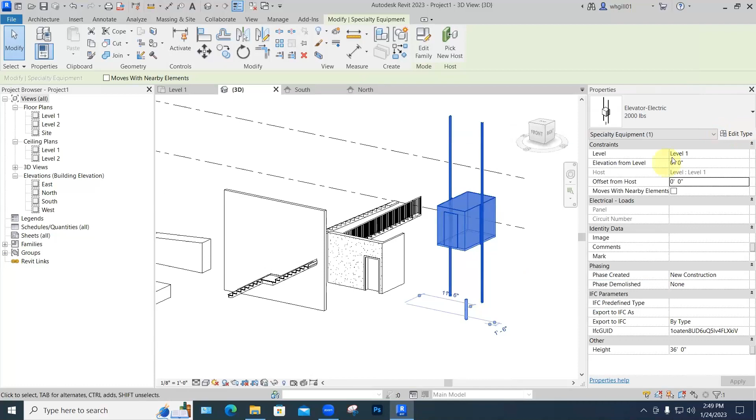Height here refers to the overall height of these rail guides from floor to just below the roof. And then I think we had to edit type to get the, this is inserted on level 1. And you can see that the bottom of the guide rails are there on the first floor. Cherokee and I worked over this last night, and I've forgotten everything we did.

So that's the height, was that a type, wasn't it? There, okay, cab location. So let's take it down to the first floor, to the ground floor. Okay, so there it is. There's its roof or its floor. I'm not sure what is going on there exactly.

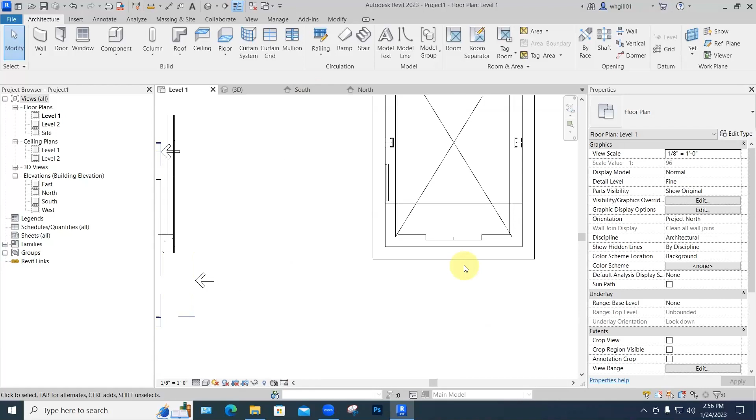Usually the structural engineer, somebody's going to be putting that in. We're not going to be. And really, we're just showing basically a rectangle with an X, and that means elevator. Okay, we'll take half an hour to do some plumbing fixtures. Look at them.

With a lot of these components that we're putting into buildings, the Kentucky building and plumbing codes are going to tell us what we need and how many, like exits and that kind of stuff, and how wide, how many drinking fountains, for instance. The ADA code will tell us what they need to look like and how they need to behave. So there's always sort of this two-part thing going on.

The building code has not, only with respect to things like stair heights and ramp runs, really accommodated the Americans with Disabilities Act, because it doesn't need to. It would just be overkill, and that creates further possibilities of conflict if they're specifying the same thing, and then one changes and the other doesn't, or they conflict. So generally what we need is the building code, and then the ADA to make sure it's accessible.

Let me just tell you what I went through working on this Schneider Hall project to see what's involved in figuring out how many toilets and how many drinking fountains we need. I've done this for you here for Schneider Hall, first floor, but I think Cherokee can attest from her own work on her own house, this becomes part of your self-study as a design professional, certainly to become familiar with the codes and know what's there, and more or less where it is and which book it's in.

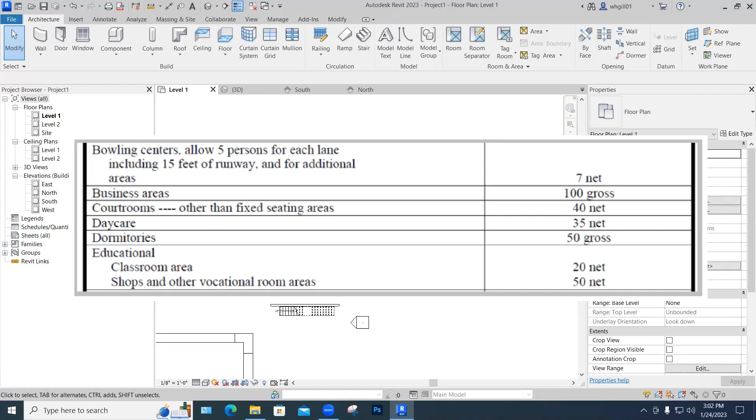So 20 net, that doesn't apply to us. We're much more in the shops and other vocational areas in terms of the amount of room we take up. So I decided to use the 50 square feet net. This is information you would ultimately attach to the drawings and have right there, so anybody can see where those numbers are coming from. So I did a quick add up of areas and got about 24,000 square feet for classroom space on this floor, and you divide 24,000 by 50, and you get 480 people.

Can you imagine being 480 people in class here? So this is when I'm thinking, did I do this right? I think I did, and if I got it wrong, I'll come back and tell you and reissue the spreadsheet. But 480 people. Back in the plumbing code somewhere, it says you can assume, unless it's a girls' dorm or a boys' locker room, that it's half and half. So that's 240 of each, 240 male, 240 female.

Then you go back to the plumbing code to determine how many fixtures per person we're dealing with, or how many people per fixture. We're actually considered a business use as far as the plumbing code is concerned, because it's basically all adults able to get there when they need to. So it's a business use for schools of higher education, and we get those numbers.

We go to page 5 and see that for female water closets, we have 1 fixture per 25 people, which is 240 over 25, or 9.6. You pretty much always round these up. If there's a real space crunch, like in an existing building, you can get the code official to say round down on this floor but round up on the next floor, so we get the same number of fixture units overall.

Same with women. For guys, we split the water closets and urinals, 5 of each. We got 10 sinks. I know you don't have 10 sinks in the women's room, right? No way. So we're significantly underserved, and that's serving upstairs too.

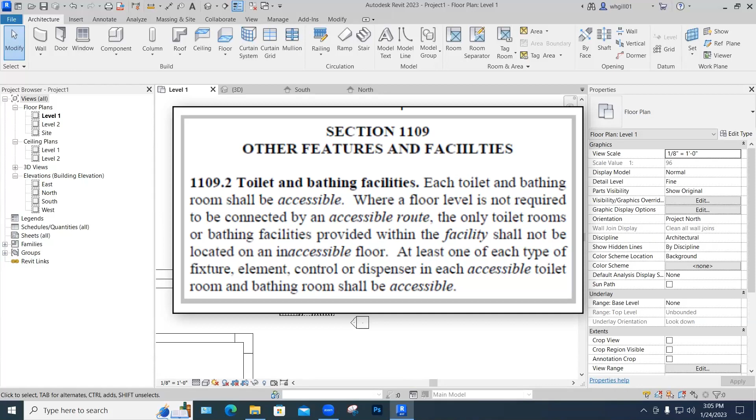That's how many we need in number 4, and number 5 is calculating how many need to be accessible. You go back to the Kentucky Building Code, and it says at least 1 type of each fixture, element, control or dispenser in each accessible toilet room and bathing room shall be accessible. So that nails it down. A couple of these don't need to be accessible, like a private lavatory off the dean's office — it's not open to the public.

So that tells us of those 10 female lavatories, if they're all in the same room, 1 of them needs to be accessible. But building code doesn't address the number of accessible drinking fountains, so you go to the ADA to see what percentage need to be accessible. It's saying basically half.

You pretty much always round up to an even number, because most of the time drinking fountains come in that high-low configuration, and you just plug those in. You've got 2 right together in the same plumbing connection and everything.

Let me show you how that worksheet works. This could be adapted for many other uses just by changing the inputs and the formulas. Once you've gone through those couple pages of stuff, you don't want to have to keep retyping things. So what I made here was a spreadsheet where the shaded cells are where we enter numbers from the tables, and the unshaded ones are where the calculations happen.

So if we figure this went to 28,000 square feet and click out, all those numbers recalculate — more people, more men, more women, more fixtures required. So we need 12 of each instead of 10 of each. If you took out a huge amount of space with your lobby and made this 15,000 square feet instead of 24, they would all reduce accordingly.

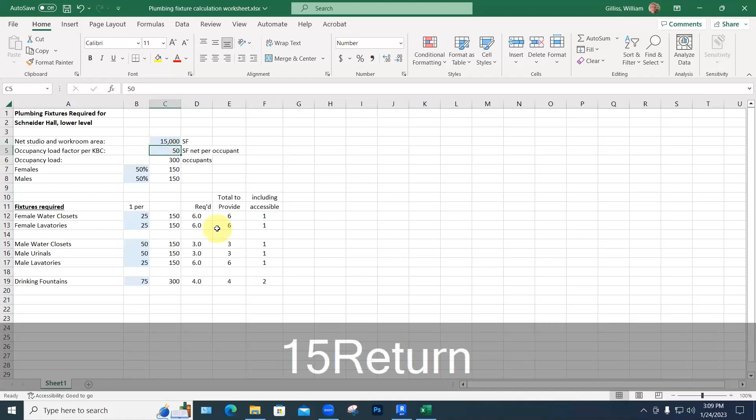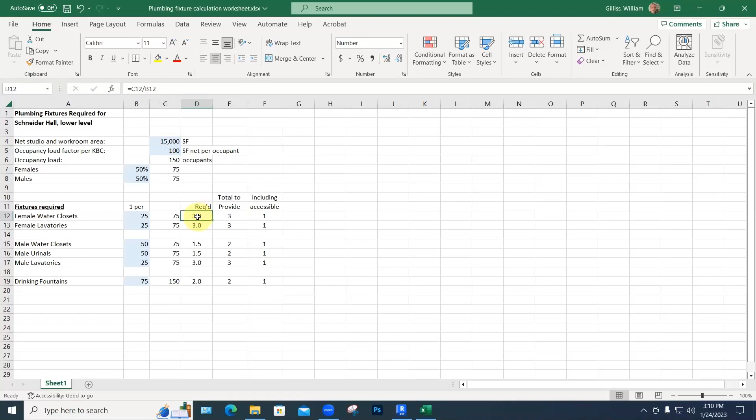And these formulas are dead simple. 150 is just this one divided by that one. The 75 is that one times 50%. This one equals that one, because that's the same number of women. That one equals that one. These are calculated through just a couple simple divisions, and they all keep track of themselves.

So let's take this back to 24,000. Let's see, we need to provide — let's just deal with the women's room where we need 10 water closets, one of which is accessible. Let's just see how that puts together in Revit.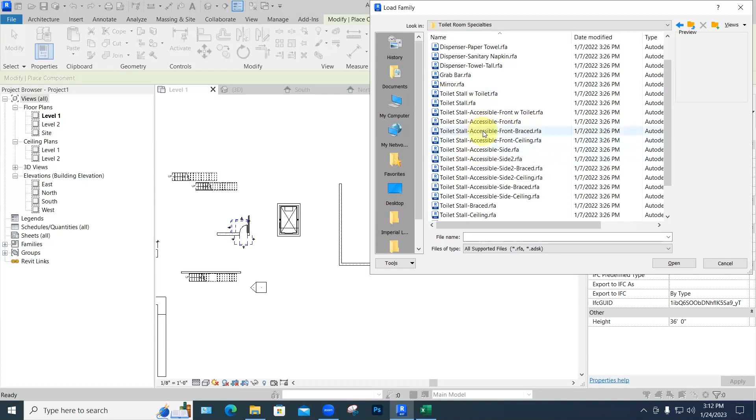So we got standalone grab bars and mirrors and things. The individual toilet itself is still back in plumbing fixtures if we need to place an individual one, but we can just go down and get an accessible toilet stall. Let's use this one, the accessible front with a toilet already in it. How great is that? And these that have bracing and stuff, I don't know, but you can see what we're going to get over here is it won't just place in space.

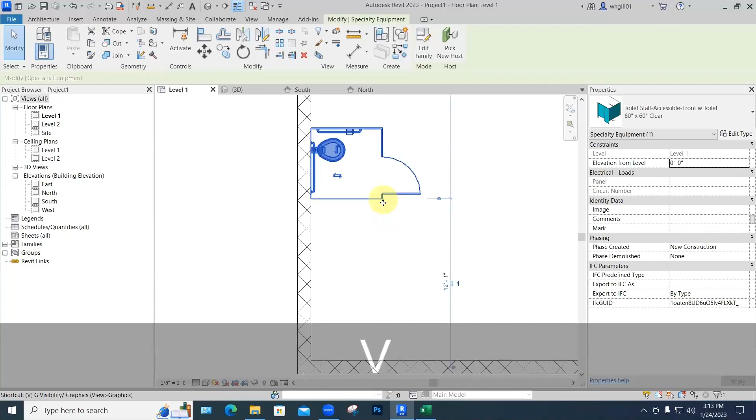It has to put it against a wall because it needs to be hooked up for plumbing. And it's got the grab bars in it already on the door. So we'll just say, okay. And so I can't place it in space, but I can place it along a wall. And then let's just move it down to have this be the last one, just to start things. Which is a pretty common arrangement, so its outswing door doesn't get in the way of anything else. And it sort of clicks into place.

That was easy. The hard part of this now becomes a true design decision. Do I want an L shape? Do I want two parallel ones? Do I want toilets here and sinks here? And then how's the door getting in? And that's what the Bobrick book is really good about. Because we want to think about, basically when you open the bathroom door, all anybody outside should see is a wall somewhere. Not any fixtures, not any people unless they're on their way out.

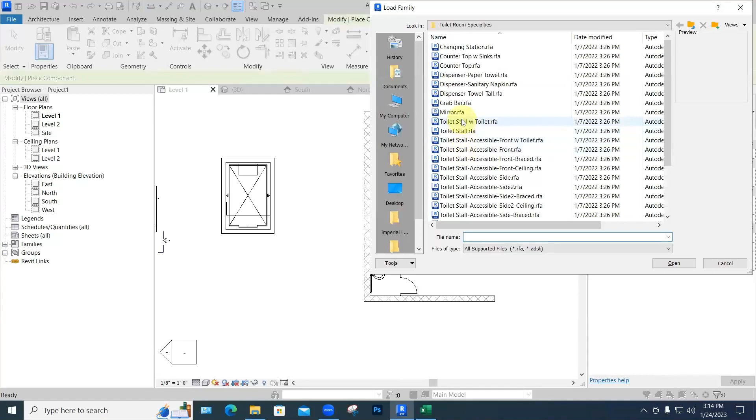So we got that. So let's just say that we're going to do half and half. We're going to do another women's room at the other end of the building, and we're just working on this one now, so I don't have to fill the whole thing up too much. So now we'll go back and get a regular toilet stall component, place component, load family, and here's just a regular toilet stall with a toilet. Overwrite the shared subcomponent family with the toilet stall with the toilet version, blah, blah, blah. I don't know, sure.

Well, my guess is, let's just say, you should use this one, see what happens. And this is the same kind of a deal where it needs a wall and it will click to the wall. And I'm going to copy that down. Move. So what this has given us is the smallest standard stall available. There is one that's not here, which is called an ambulatory accessible. And that's another like 6 inches wider. So somebody can get in there and have a place to hang up their crutches and turn around more conveniently. But for this, we're just doing this.

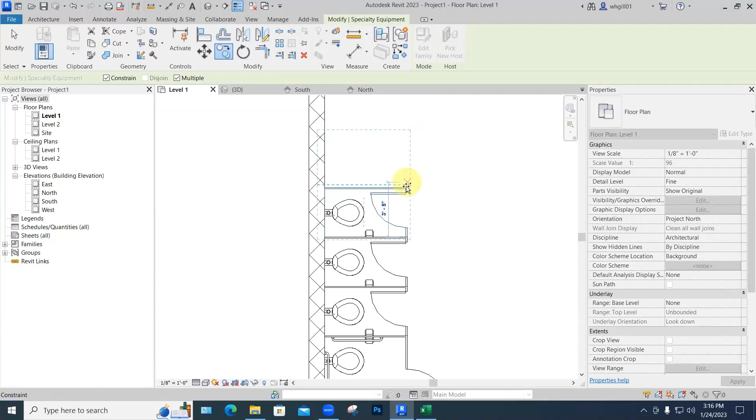And you can see that this is a little short, but it comes with the bigger version that's as long as this guy. It seems like it got a little wider as well. So we can just copy that from there to there. You thought this was going to be hard. You thought I was saving the hardest part for last. I saved the easiest part for last. So there are those. None of these have like a changing station or anything in them yet. Maybe that goes on the wall down here, and then whatever.

A couple things about the toilets themselves: we're showing all wall-hung toilets, which you'll always have in a commercial facility. They take up less space because you don't need the tank, and are far less prone to vandalism. With a residential toilet, you've got that little tube coming out through the wall or the floor or something or other. Don't have any of that. There's no bobbers to mess up and keep running. It's just very straightforward. And they're much easier to clean. You can just mop right underneath them because they don't come down to the floor. So that's all you're going to see here.

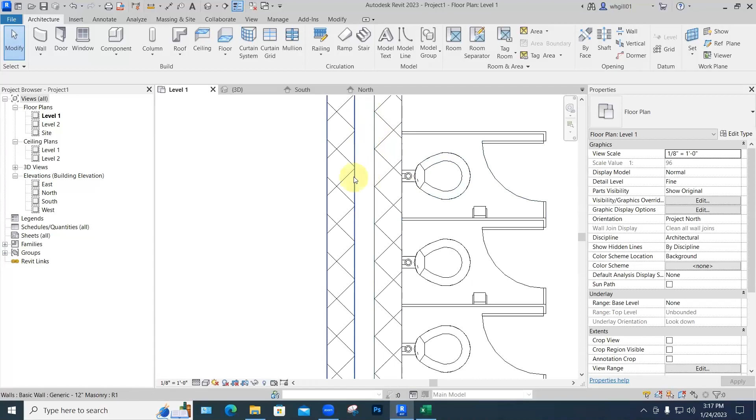And they require a strong wall behind them, preferably masonry, so you can really bolt those suckers in there. And a lot of times, and you might even see it in this drawing, you'll have a double wall there where all the plumbing is actually in. This wall goes up, holes are drilled through, the plumbing is installed here, goes into the fixtures, and then this wall is built afterwards. So it's just completely sealed up. And sometimes that will be like the men's room opposite, in which case they put the plumbing in and stub out pipes for the toilets, and then cut the blocks and fit them around and come on through.

Let's do individual sinks, see how that works. Component, place component, load family. Sinks aren't here, anything special. Don't think. Those will just be back in plumbing. Oh, changing station. Let's do a changing station.

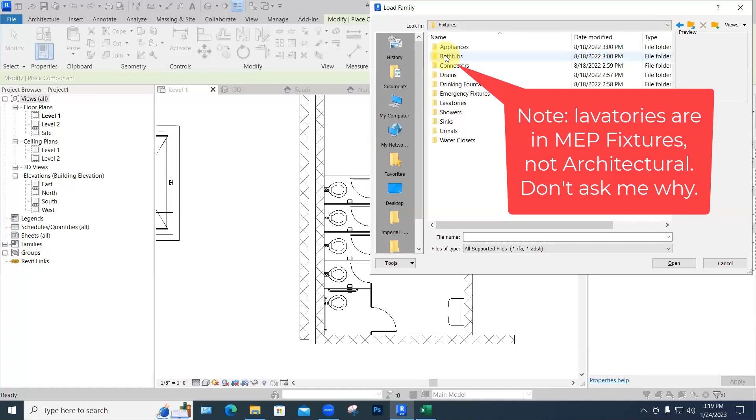Go get us a sink, at least one of which needs to be handicapped accessible, which are usually longer so the wheelchair can get underneath them, and lower. So let's go up to plumbing. Revit uses the word sinks to refer to ones that are mounted in a countertop or the like. It uses the word lavatories to refer to standalone pedestal or wall-mounted ones and hides them in the MEP folder.

Wall-mounted lavatory, let's just do that. Now, for some reason, Revit thinks it's okay to place this on some weird surface that's not vertical. A bunch of these, when they won't seem to click, it's because we're not telling them to place on a vertical plane. But then we can do that. And that could all be one long countertop with separate ones, whatever floats your boat. So this takes care of the walls that we have for plumbing. From now on, we can use regular interior partitions.

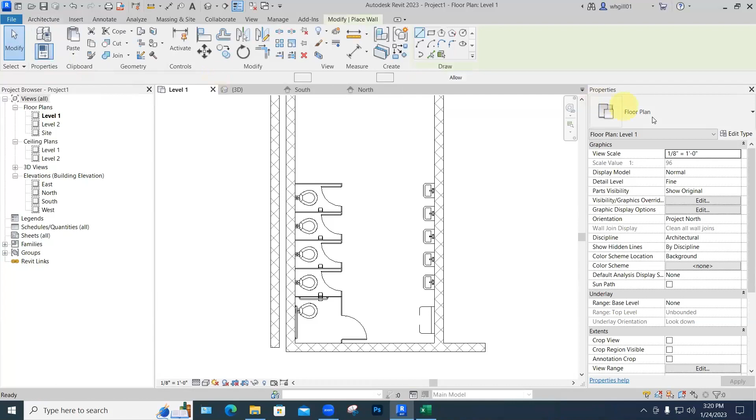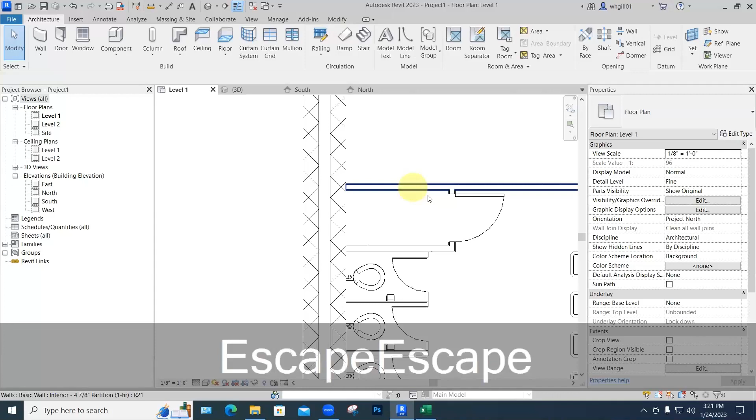Let's use this guy. Probably there's a stall in here that doesn't have this piece right here, but I'm just going to run this right along next to it for the time being. I don't know what we're going to do here. Let's do a door. Oh, that was my last door. Not yet. Not ready for that yet. And I'm just going to do an opening here. Let's do another door. Now I can do my cool door thing to see if these are going to work for that. DR for door.

So I'm going to put it along this wall first. Slide that over. And see that this door, I only approach from this direction. So I need to have all the way down here to be inside there. So we'll pick this and pick the wall and kick up to there. A little extra room. And I need to be clear out to here. So I'll slide that out like that. And now we have, for that door, clear floor space as needed.

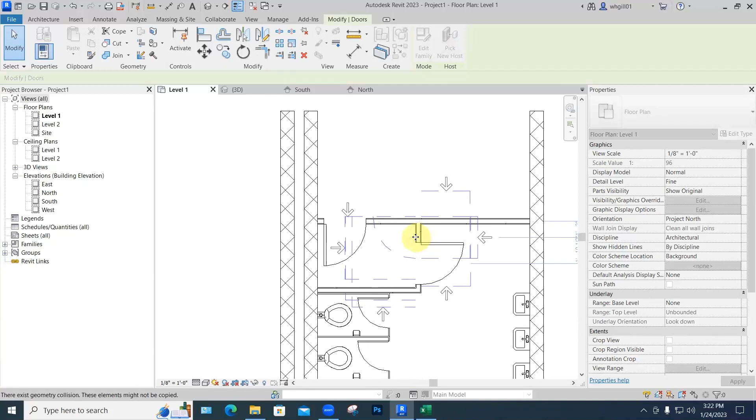And that's the only direction we're approaching that one. I don't have to worry about these two arrows. Outside, we don't know what's happening, so let's assume that that's all good. Because I'm approaching from this direction, I'm covered. I'm approaching from this direction, I'm covered. So I'll get rid of that. Actually, I'll say pick a new host and put it here on this door. Having two overlapping is more than my brain can deal with. So we'll do that. Flip it.

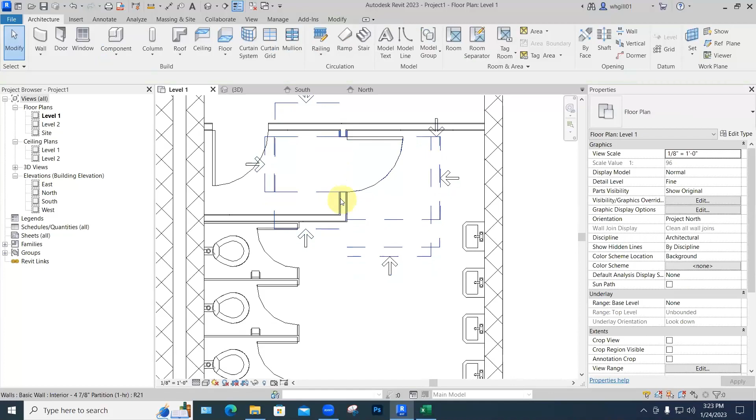And realize that as I'm approaching this door from here, I'm good. I think this door swing is really not supposed to overlap that little space. So let's just move that wall down some. Both doors go with it. Now I know I'm clear. We're approaching this door from... Generally, we put this over here. Approaching from this direction, I'm good. Approaching from this direction, I'm good. So I think we could use that as at least an initial design for that. I guess you probably want the sinks to move down a little bit or whatever, but that's how that works.

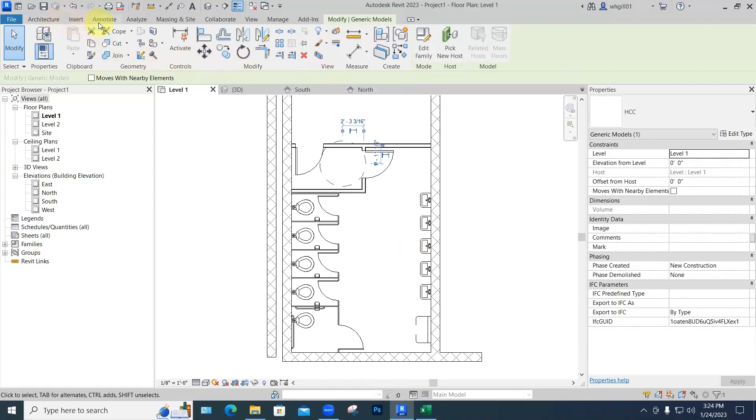A couple other things let's do with this. I've got a couple other components here. Place component, desktop. I've got a handicap circle. Just to say I've got that, and look, it works in here too, except that it doesn't. Interesting. So that's something else to pay attention to. Okay, and then architecture component, place component, load family.

Anytime you can use the circle, you can also use this shape, which works especially in small bathroom situations where you're having to stick this little prong down between a sink and a toilet or something. But as far as the code is concerned, those serve the exact same purpose of making sure that there's room inside the room for a wheelchair to turn completely around without bumping into anything. So, bathroom design. How hard is that?

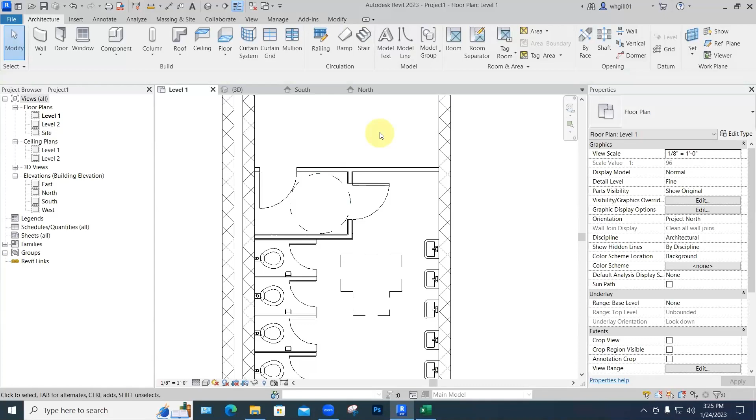So I will get back to you on those plumbing questions about what our actual numbers are required, to see if that changes, because it seems to me like 7 or 8 drinking fountains for this floor is just a lot. The thing is that number seems a lot, but this room is, let's say, 30 by 40, 1,200 square feet, divide by 50 is 24 people. And you can get 25 people in here working the way we work. So that seems appropriate. I know. Well, so that leads me to the question: are my numbers right? And I'll be talking to the guy who knows better than I do.